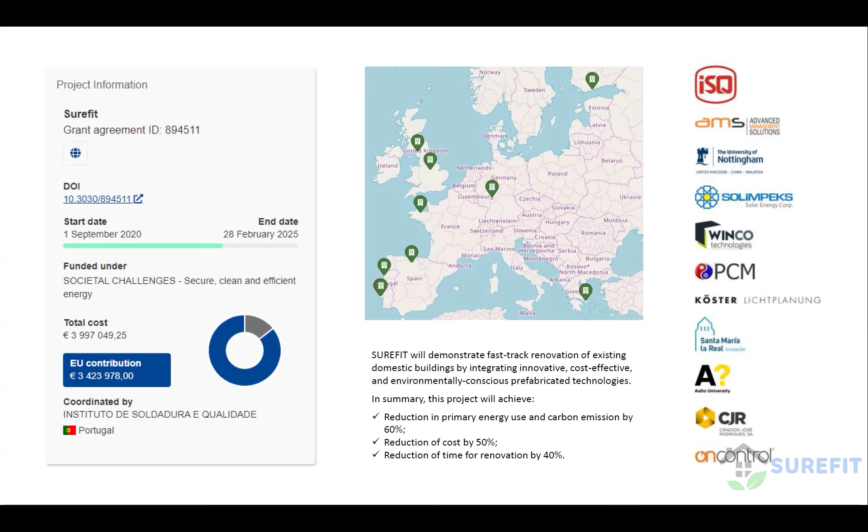We are going to develop solutions for the building envelope: bioaerogel, thermal insulation, breathable membrane, phase change materials, PV vacuum glazing, daylight louvers, and the use of renewable energy sources such as geothermal and solar assisted heat pumps, ventilation and heat recovery systems, and PVT solar collectors. And other technologies for heating, ventilation, air conditioning, and lighting, like evaporative cooling and smart controls.

We have tested the application of Surefit solutions in 5 countries with very different climate conditions, with heating degrees ranging from 840 to 4,000 degrees per year.

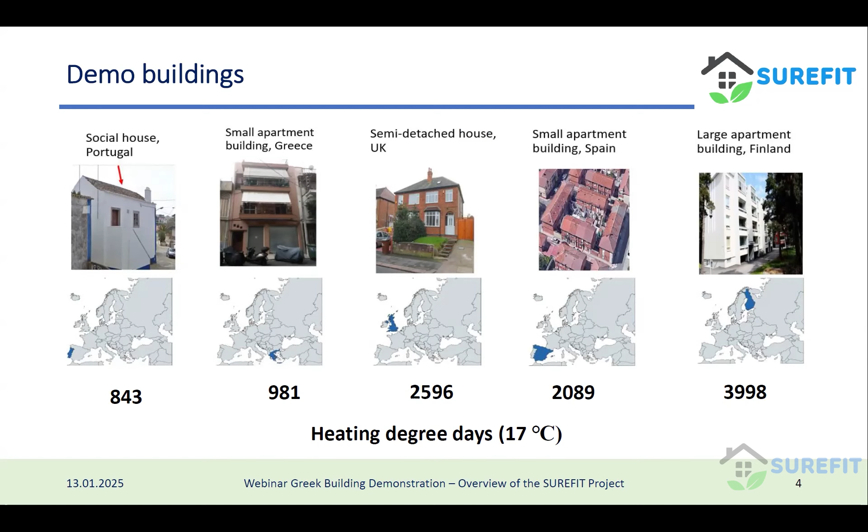Those who deal with energy conservation measures in buildings know that there are countless possibilities to make a home more efficient. Therefore, a tool was developed within the project to assist decision-making by balancing environmental, economic, and social criteria. This tool is perfectly aligned with the new EPBD review, and is now also available on our project webpage. I strongly suggest that you visit it.

That's it. Now let's see what was done in the Greek demo building. And now we can proceed with the next presentation. Thank you very much, Sergio, for this presentation. Let's proceed now with Maria Pappa, and we will see what has happened in this building in Peristeri.

Good morning, everyone. My name is Maria Pappa. I'm a chemical engineer, and I work in AMS as manager in EU projects. Today we will give a presentation about the Greek case study in the framework of the Surefit project. In this slide, you can see the main technical team that worked on the Surefit project for almost 4.5 years. Sofia Papadopoulou is a mechanical engineer, and also Konstantinos Tsoutis, construction manager, who is also the managing director of AMS.

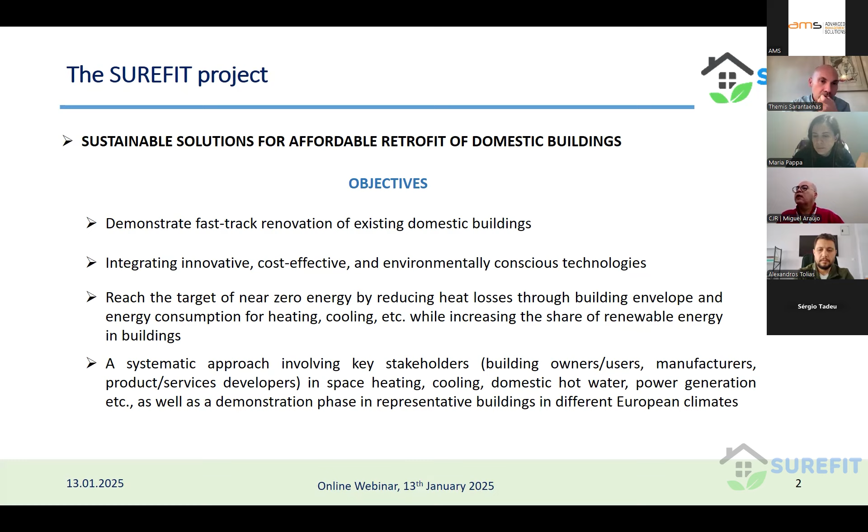As shown before, we had a number of available Surefit technologies: thermal insulation materials like bioaerogel, prefabricated panels, phase change materials, photovoltaic vacuum glazing windows, solar-assisted heat pumps and ground source heat pumps, integrated solar thermal and PV systems, and lighting devices, among other technologies. We had to decide...

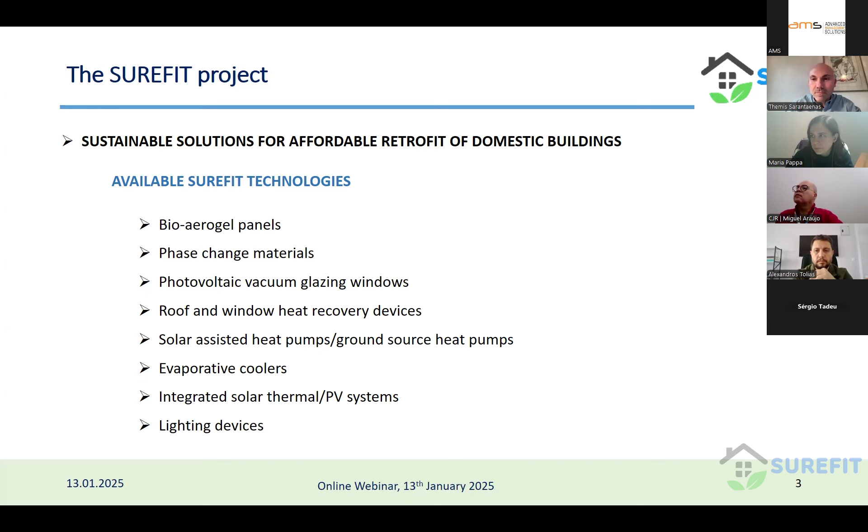...which of these technologies could be implemented in the Greek demo site in order to achieve the main goals of this project, which I will show you later. So these were the technologies we had to deal with, and now I will describe the building and the apartment in Greece. It is a first floor apartment in a 3-story building.

The apartment, shown in the yellow framework, was built in 1981 and is located in the city of Peristeri in Attica, Greece. So we are talking about South Europe, an Eastern Mediterranean country, with a hot summer Mediterranean climate type according to the Köppen climate classification. The orientation of the two main facades, as you can see in these schemes, is north and south.

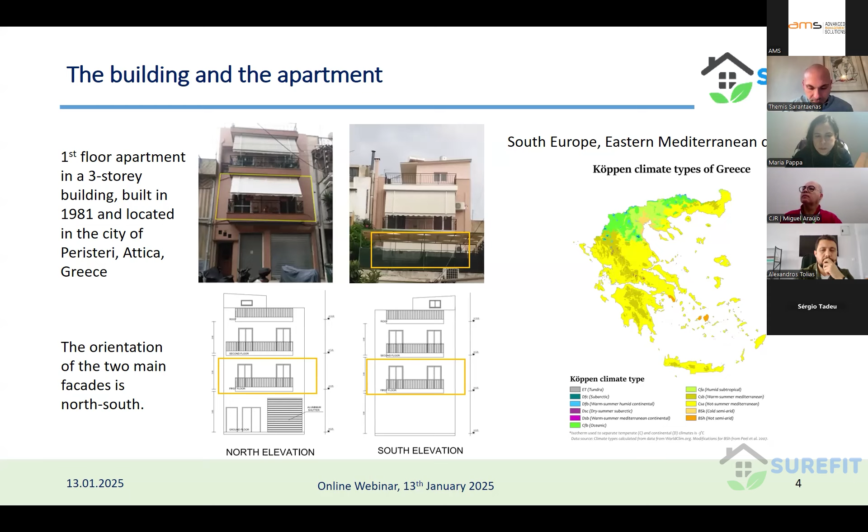Moreover, the building and the first floor apartment that we worked with is attached to two other buildings on the east and west sides, so we can assume it was kind of protected by the neighboring buildings, which were occupied, cooled and heated.

Below this first floor apartment, there is a ground floor that consists of two spaces that used to be shops but not anymore, so this area below the apartment is not regularly used, heated and cooled.

The first floor that interests us is a one-family apartment with 4 persons living there, approximately 90 square meters. The second floor, above the apartment we worked with, is also another family apartment of approximately 90 square meters.

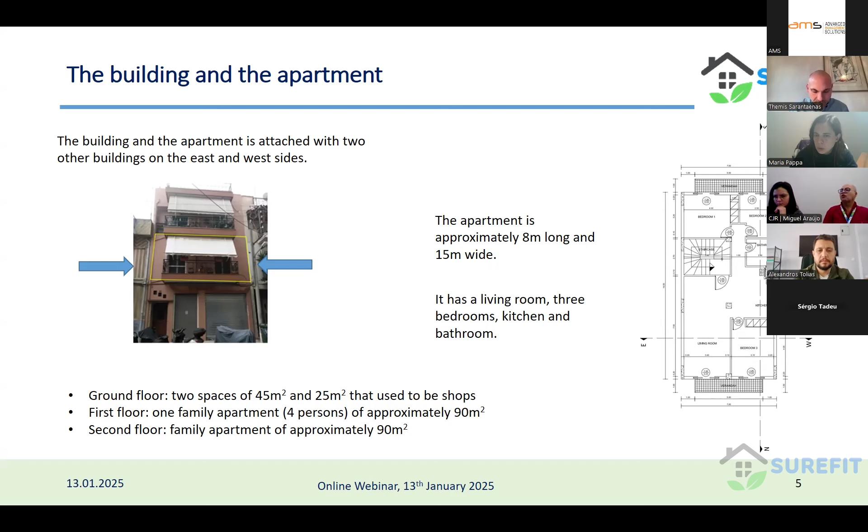In this scheme, you can have an idea of the dimensions of this building: approximately 8 meters long and 15 meters wide. As you can see in the scheme, it has a living room, 3 bedrooms, 1 kitchen and 1 bathroom.

The building is constructed with concrete pillars, and the walls, as you can see in the photo on the right, are made of bricks with 6 hollows, dimensions 19 by 9 by 6 centimeters, using an installation methodology of single brick, a gap, and another single brick. This gap was filled when constructed with a polystyrene layer.

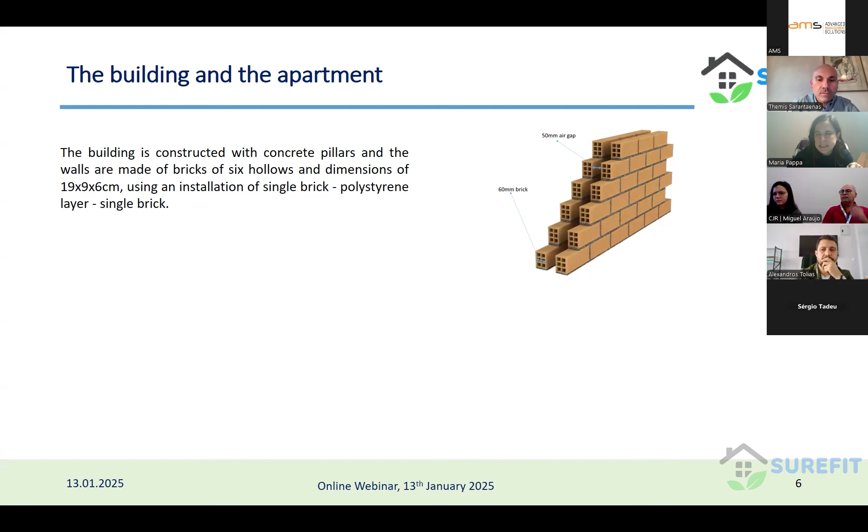But throughout all those years, more than 40 years, we assumed, and this was confirmed during the construction activities, that this layer was destroyed. Moreover, this building had sliding balcony doors with single glass 8 millimeters thick, aluminum frame, and awnings. Heating was applied through a diesel boiler, cooling was supplied through air conditioners, and hot water was supplied by a low pressure water system from a triple energy boiler.

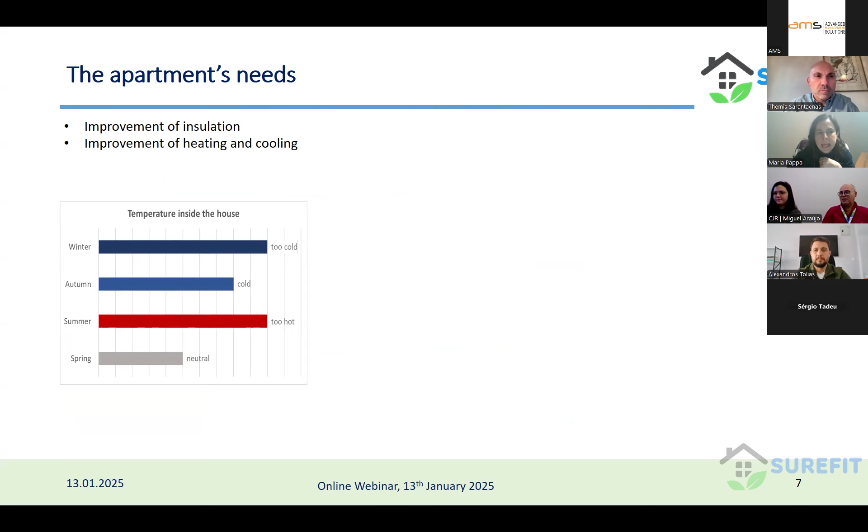Moreover, the occupants of this apartment said they had overheating issues through the windows because they had single glazed windows. And as you can see in the graphs below, they were very much annoyed by the noise coming from outdoor activities, outdoor leisure, neighbors, and road traffic.

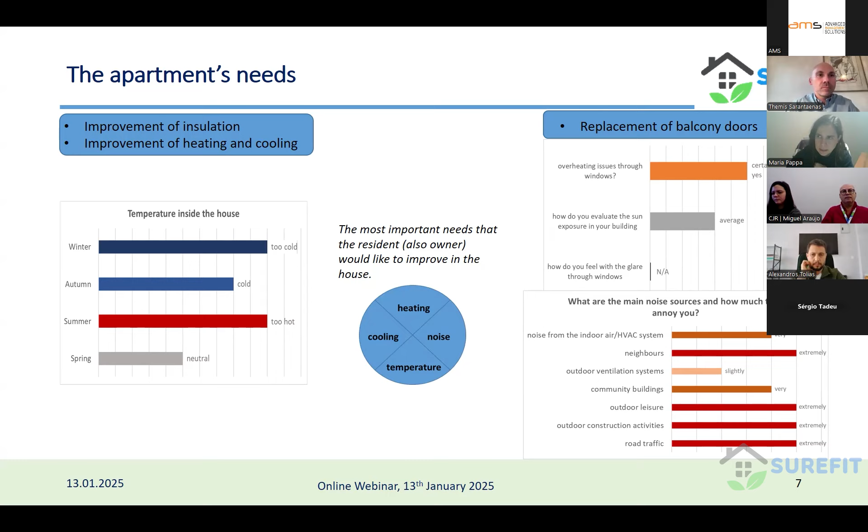In general, when they were asked about the most important needs of this apartment, they said that it had to do with the heating, the cooling, the noise, and the temperature.

We did a leakage testing in this apartment using the blower door methodology, and this showed that all frames had strong inflows on all sides, with a high index of 6.27 uncontrolled exchanges per hour at 50 Pascal pressure—a particularly high percentage of losses from the entire building shell. This results in the ineffectiveness of the heating and cooling system of the apartment before the renovations.

We also did thermal imaging, and as you can see from the shots from the interior of the house, there was poor thermal and air tightness properties of the existing frames and windows.

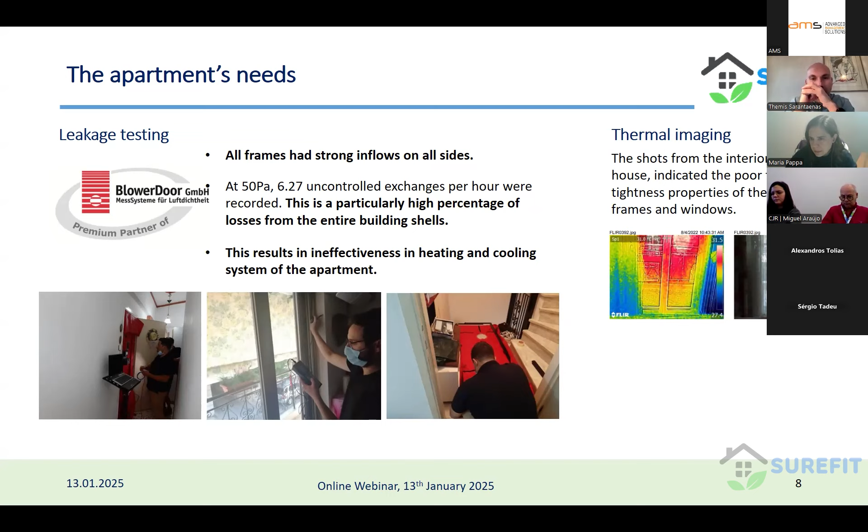Regarding the renovations that were decided, Aalto University, partner in the Surefit project, performed the energy simulations using the IDA software.

In this table, you can see the original purchased energy before the renovations, 120 kilowatt hours per square meter. The primary energy before the renovation was 143 kilowatt hours per square meter, and the CO2 emissions were estimated to be around 36 kilograms per square meter.

During this modeling, by applying a number of Surefit technologies and one commercial technology, and by taking into account the needs of the apartment and the owners, we reached a final case expecting 62% reduction in purchased energy, 61% in primary energy, and 61% in CO2 emissions.

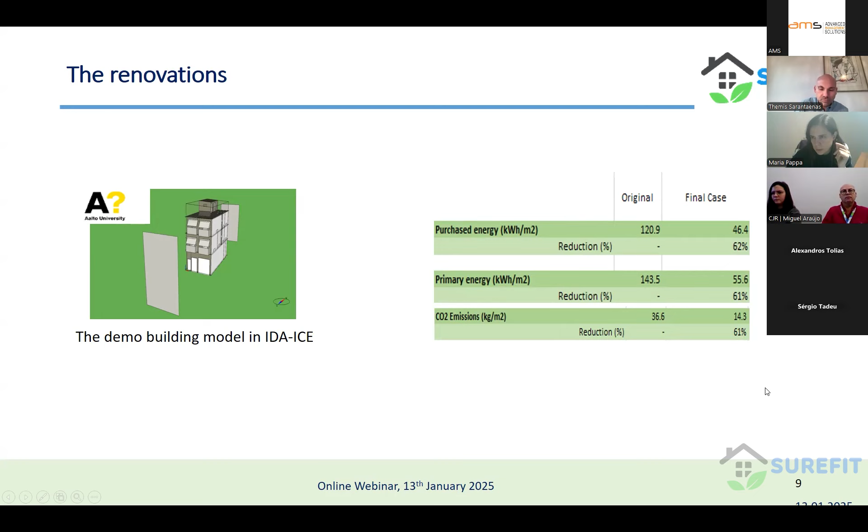So what were the renovations that have been decided? We decided to insulate, as you can see in red, the ceiling of the workshop located on the ground floor below the apartment, because this space is not properly cooled and heated.

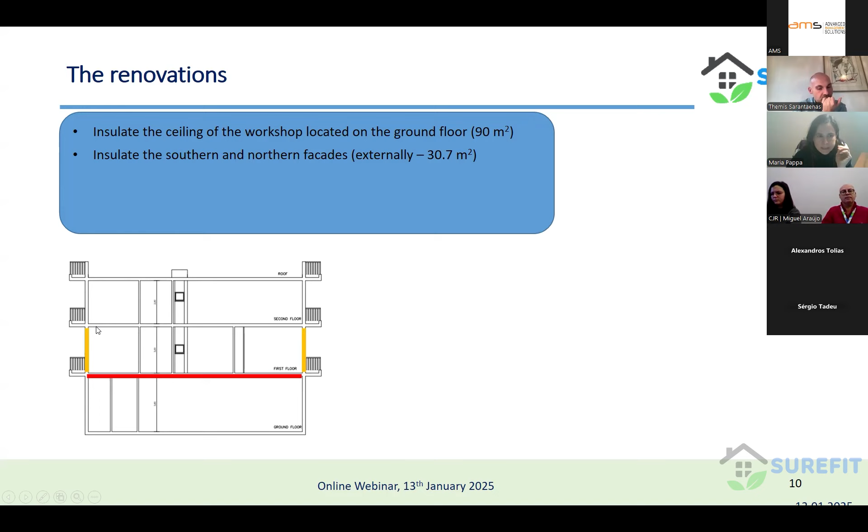We decided to insulate the southern and northern facades externally. We installed a PV vacuum window in one balcony door of this apartment, choosing only one because this technology comes from a university, so the resources and capacity to manufacture big units was not easy. The rest of the balcony doors were replaced with commercial double-glazed PVC balcony doors. Finally, we installed the PV thermal system for electricity production, domestic hot water, and space heating.

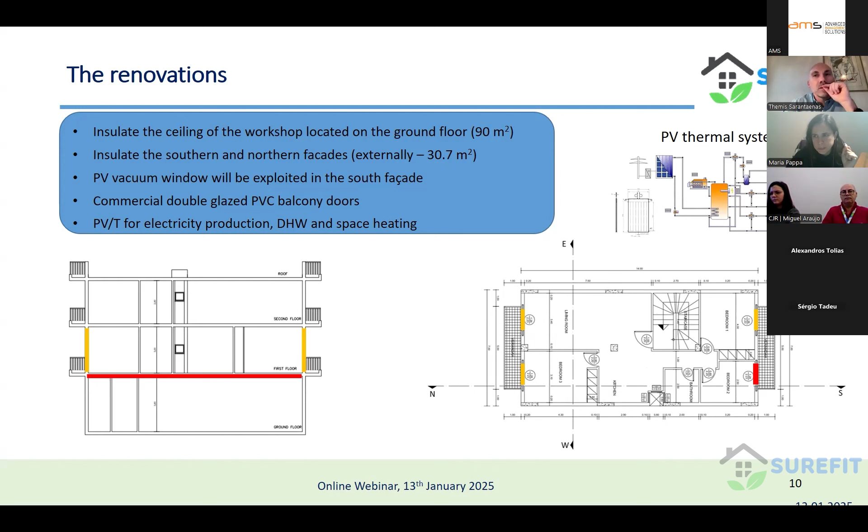I will start with the first installation, the PV thermal system. Mahmut from Solimpeks will give a short presentation after mine, where you will have the possibility to hear more details.

A PV thermal collector is a combined collector from a PV module for the generation of electrical energy with a highly efficient solar flat collector for the production of heat energy. The solar to electricity conversion efficiency is around 20%, the solar to thermal conversion efficiency around 47%, and the lifespan of this technology is more than 20 years.

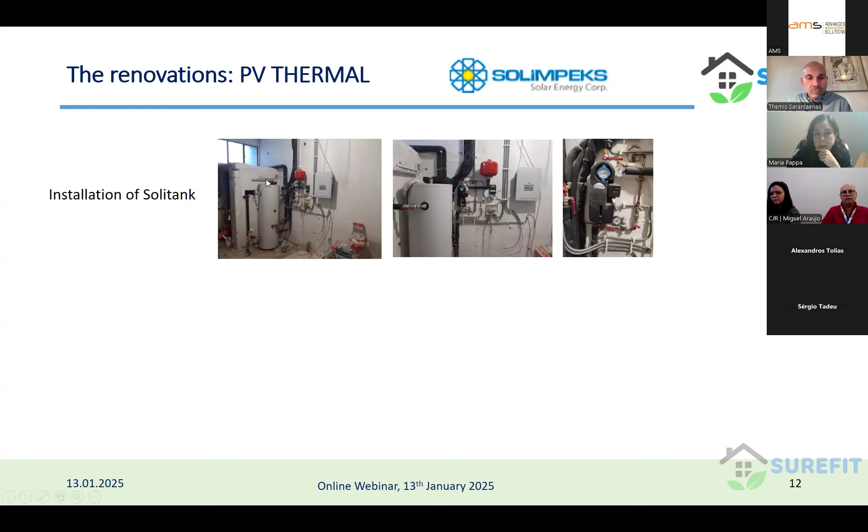We had to install the tank of this system, and the only space available in this building was the ground floor. We had to demolish an existing water closet in order to fit all this equipment, and we had to do the piping and wiring connections, passing them through the first and second floor in order to reach the terrace where we installed the PV panels.

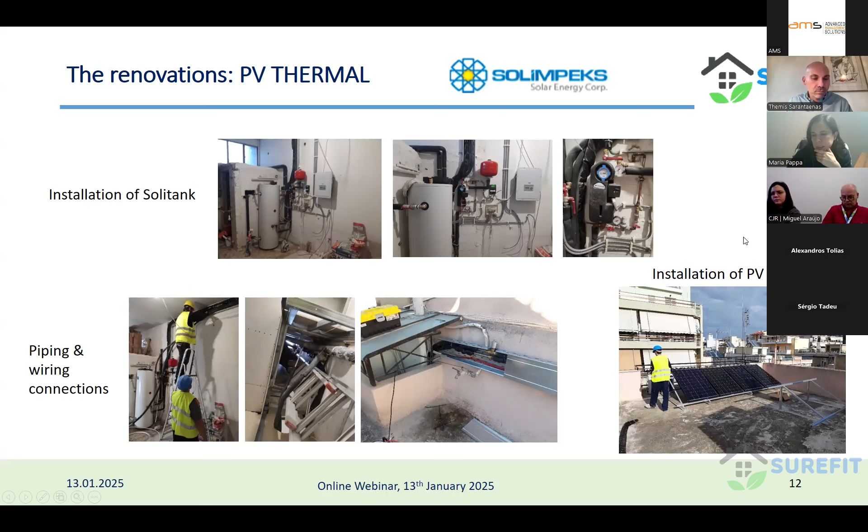This was the first technology. The second one was a commercial technology. As I mentioned before, 3 balcony doors were replaced with commercial systems, PVC double-glazed windows, PVC frame. You can see the U value of the system, and of course external aluminum rolls.

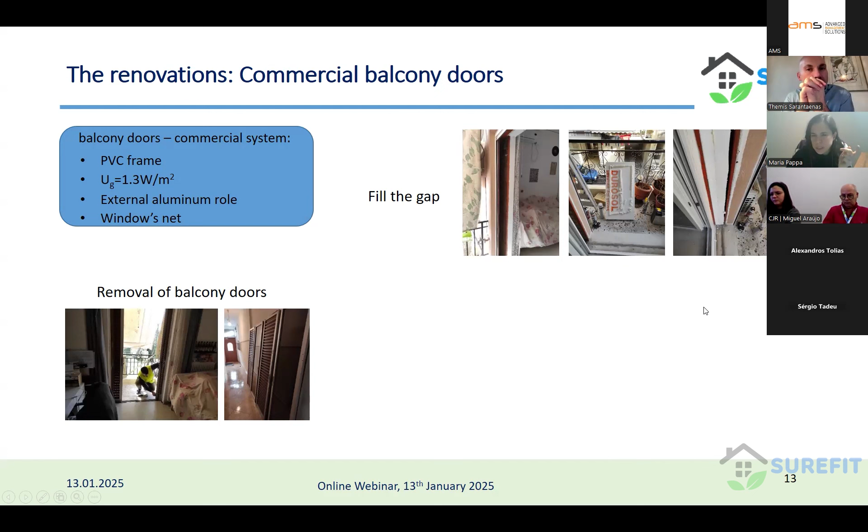So we had to remove the balcony doors. The existing balcony doors were sliding doors. After the removal, we had to cover the gap that was created, and for this we used a commercial thermal insulation panel and installed the new balcony doors.

The third technology is from Winco, the Skytech Pro XL membrane. This is the membrane that we used to insulate the ceiling of the ground floor, a 26 millimeter Skytech membrane. You can see the thermal conductivity, 0.029. It also offers sound reduction, and is available in 3 thicknesses.

This product is mainly installed to act as a rain screen in an existing facade, and to operate efficiently a ventilated air gap is needed on the external side of the membrane. In the Greek demo case, this was not possible due to the restricted height of the facade and the balconies. So we decided to use this product only as a thermal and sound insulator for the ceiling of the ground floor.

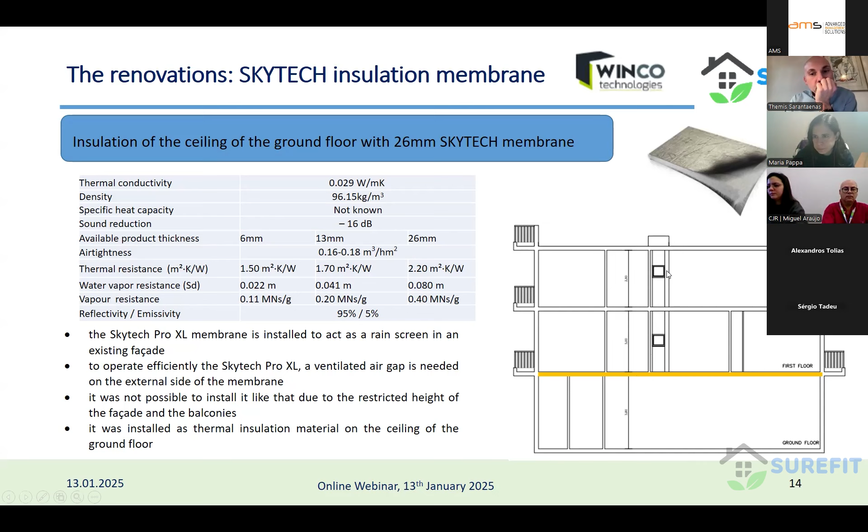So we had to remove the false ceiling of the ground floor that existed. We had to place a frame, and on top of this frame, we put the membrane. Then reinstallation of the false ceiling, and do the final painting.

The fourth technology is coming from CJR, partner in the Surefit project, and is the prefabricated insulation panel. The idea was to put thermal insulation on the north and south facade of this apartment. We chose a sandwich-like panel of 30 millimeters commercial polyurethane panel plus 20 millimeters aerogel blanket commercial plus 20 millimeters XPS panel. The thickness is 7 centimeters because we had this restriction for the building. You can see the U value of the system, existing wall plus the panel, is 0.22.

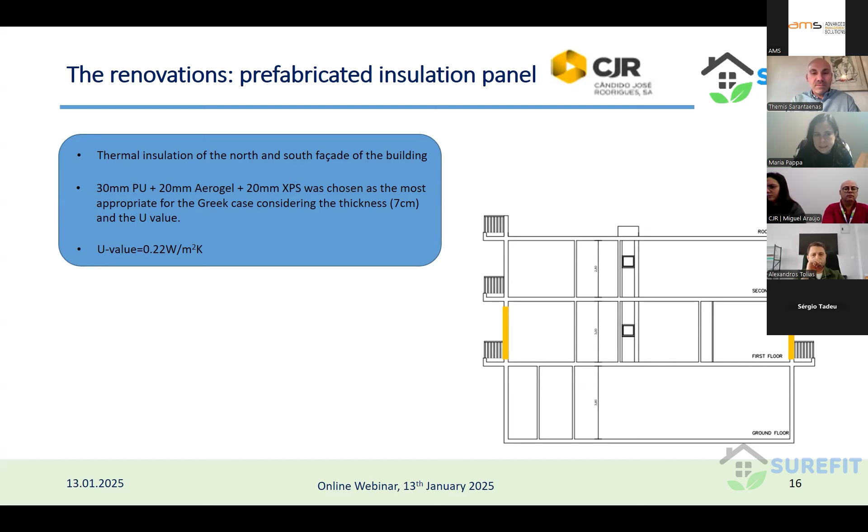So we did the installation as we do for commercial thermal insulation panels, ETICS. We put an adhesive at the beginning, we placed the panels. Of course, we had to cut them in the appropriate dimensions and also drill holes for the piping from the air conditioning that was existing. We put sealant between the panels to seal the gaps. We did the fixings, placed the reinforcing mesh, the mortar coat after that, and the decorative finishing.

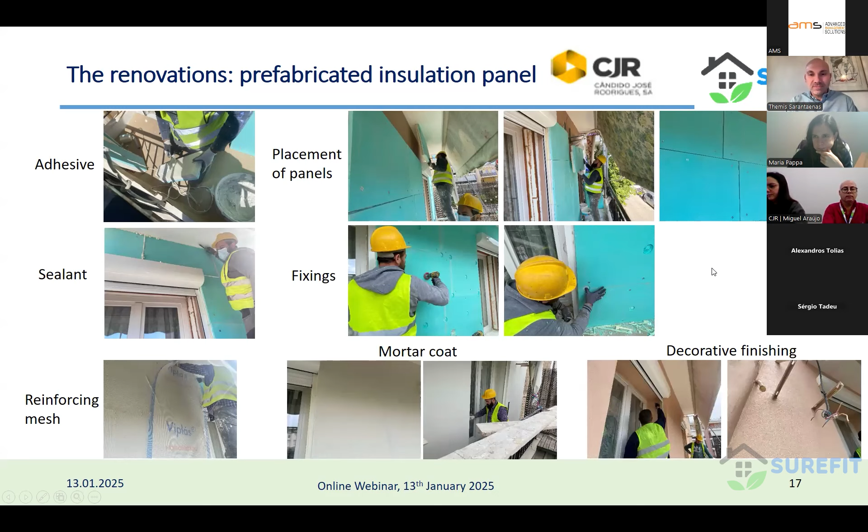And the last technology in this building was the PV vacuum glazing from the University of Nottingham. You will see more details about all these technologies after my presentation, but to have an idea, this is the system you can see in this scheme. It consists of 2 glasses, and in between them there is a thin film of a PV layer. Then we have an air gap, and a vacuum layer, and then we have the low emissivity coated glass.

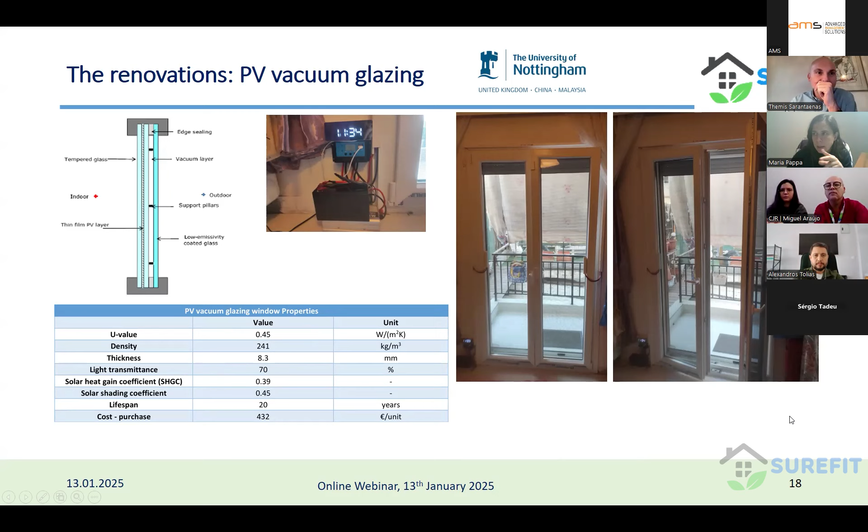And you can see the U value of this system, 0.45. The thickness, 8.3 millimeters, and the light transmittance is 70%. So we installed this system in a double balcony door in the south facade of the building.

Now, regarding the evaluation of all these renovations, based on the data we have from the energy monitoring, we put energy meters, so these are real data. You can see the total electricity consumption for this apartment from the grid before the renovation was 5,600 kilowatt hours per year. In the post-renovation phase, we have 2,400 kilowatt hours per year, plus 1,800 coming from the PV panels we installed. Transforming them into primary energy, we have a reduction of 56% between the pre and post-renovation phase.

Regarding the oil energy consumption, before the renovation it was something like 5,000. After the renovation it is 2,300. So the corresponding primary energy consumption reduction is 52%. And regarding the total primary energy, the reduction achieved due to the Surefit technologies is around 55%, which is very close to our target that was 60%. Regarding CO2, the total CO2 emissions reduction is again 55%. The target was 60%.

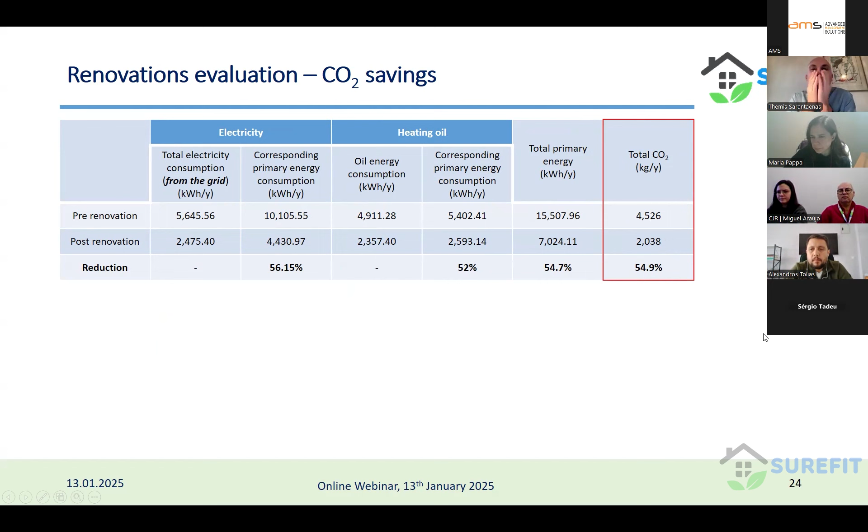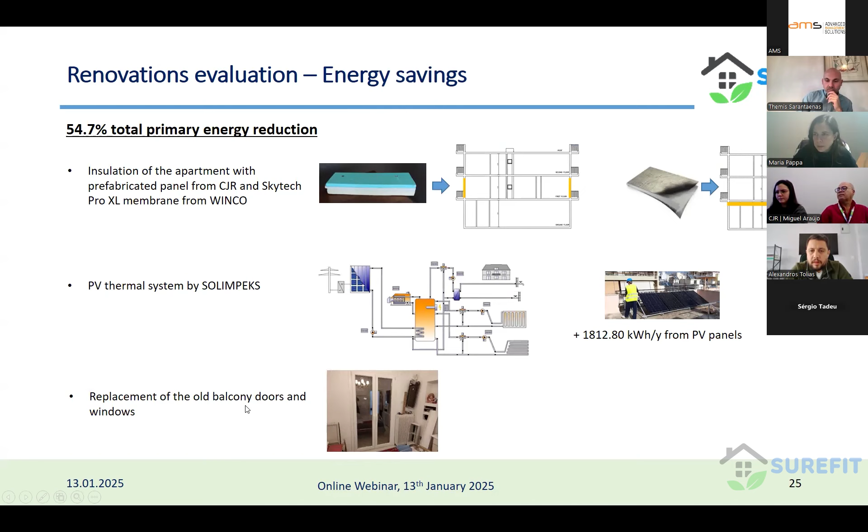Now, this 55% total primary energy reduction can be attributed to the insulation of the apartment with a prefabricated panel from CJR and the Skytech Pro XL membrane from Winco. It is also attributed to the PV thermal system by SOLIMPEKS and also to the replacement of the old balcony doors and windows. For this, we did another air tightness test after the renovations.

You can see that before we had 6.2 air changes per hour. When we replaced the balcony doors, we have 2.2. So we achieved a 65% improvement of the air tightness. Now we have this satisfactory index of losses from the entire building shell. This increases the efficiency of the heating and cooling system of the apartment and confirms the quality of construction interventions regarding air tightness.

Also, during winter the building was slow to heat up, now it is quick. During summer, it was slow to cool this apartment down, now it is quick. Also regarding noises coming from outside, before they were extremely annoying or very much annoyed by the outdoor noise. Now this has very much improved. They are slightly annoyed, and this is not only because we changed the balcony doors.

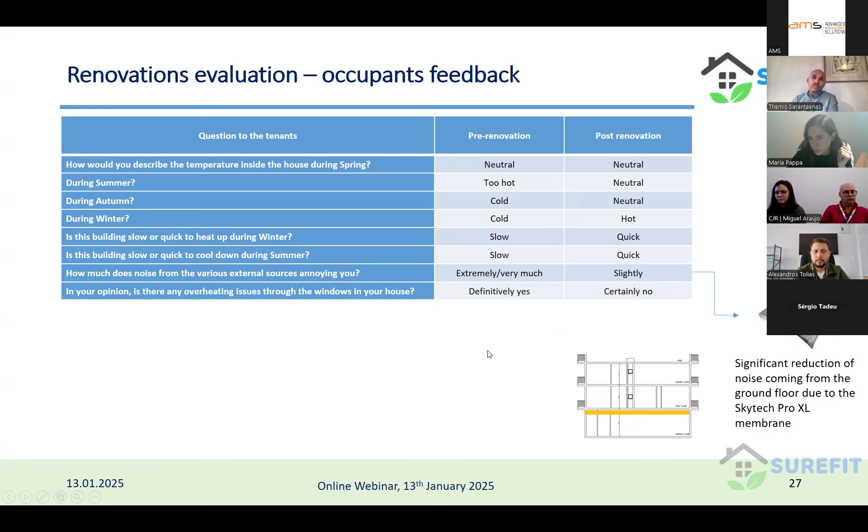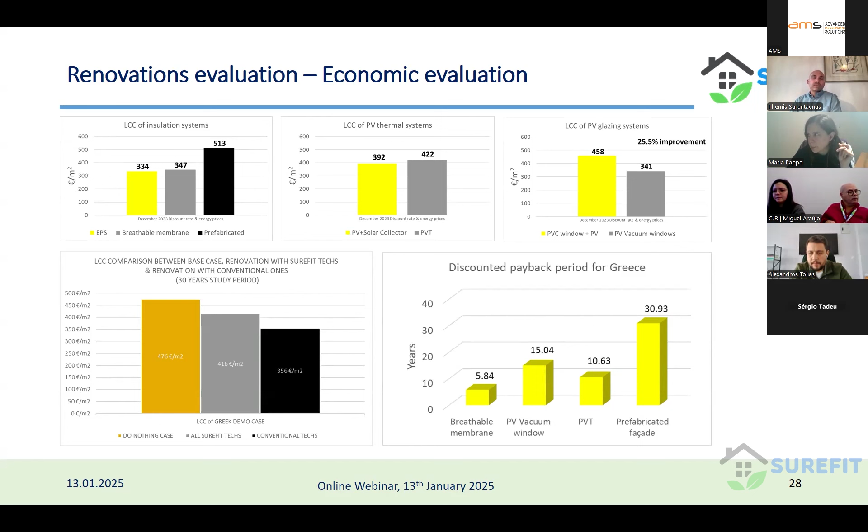By applying Surefit technologies in this apartment, we have a 55% reduction of the total primary energy and the CO2 emissions. We have 42% of the electricity needs coming from the photovoltaics that were installed, and 65% improvement of the apartment's air tightness.

We have a 25.5% improvement in the life cycle cost analysis for the PV vacuum glazing compared to conventional technologies, and comparable life cycle cost assessment for the breathable membrane and the PV thermal system compared to conventional technologies.

We achieved a payback period of almost 6 years for the breathable membrane and almost 10 years for the PV thermal system. The payback period for the prefabricated panels and the PV vacuum glazing system is more than 10 years, which is out of the scope.

Unfortunately, we did not achieve any installation time reduction compared to conventional systems; the installation time is almost the same. The last point is that we received very positive feedback from the occupants related to the building performance.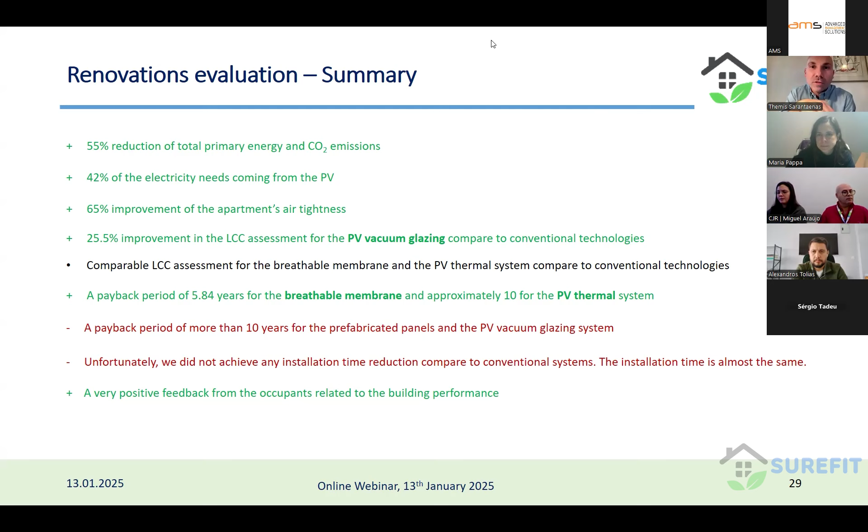Are we going to watch the video now or at the end of all presentations? It is up to you. Okay, let's see it at the end of all presentations, so it will work as a summary.

So we just saw all these impressive results from the Greek demo in Peristeri.

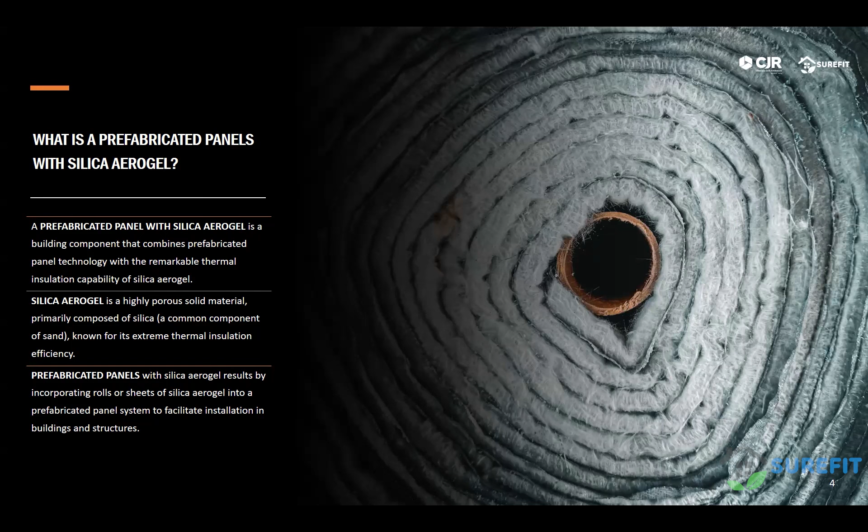The silica aerogel blanket is an excellent insulation, which allows with little thickness to obtain results like other materials on the market. However, to make its application faster and more efficient, it was decided to prefabricate the technology and convert the already known external thermal insulation composite system, the ETICS, into the one we present today. Our insulation panel, SAPPETI, combines silica aerogel in a blanket with a more rigid insulation material to provide more resistance, better handling, and fixing, making it prefabricated.

We developed two different solutions: one for Spain with 20 millimeters of XPS plus 20 millimeters of silica aerogel and 20 millimeters of XPS, and another for Greece with 30 millimeters of polyurethane attached to the building, plus 20 millimeters of silica aerogel and 20 millimeters of XPS. We already made some tests to determine the thermal resistance of this building component, the prefabricated panel, and also to get the U value.

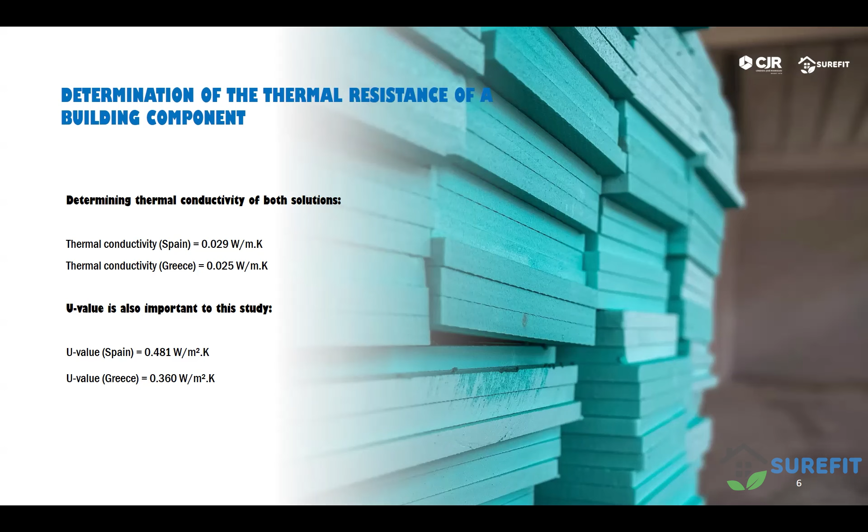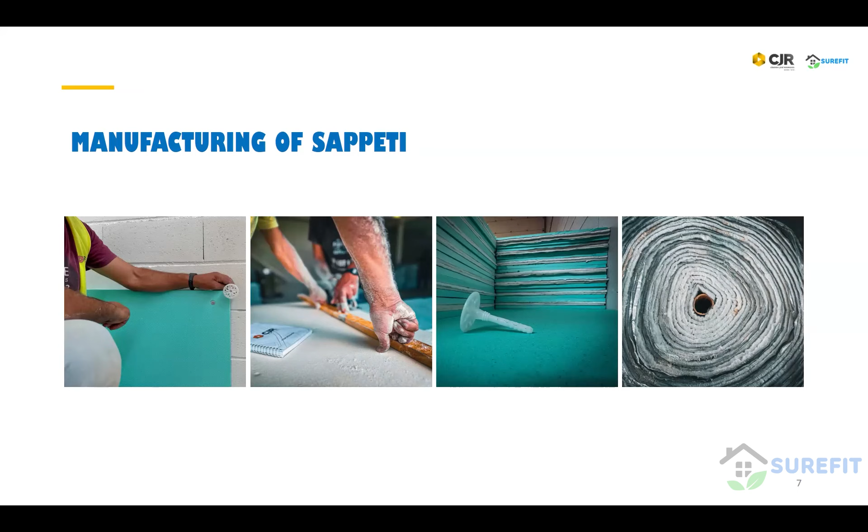Currently, the panel is produced manually, a process that ensures attention to detail and the quality of the final product. However, this method requires more time and entails higher production costs. If this solution is implemented on a large scale, the production process is expected to become automated, significantly reducing costs while maintaining high quality standards.

Next, we'll see a video of that production. As it was not possible to obtain a 20... no, you can't hear me.

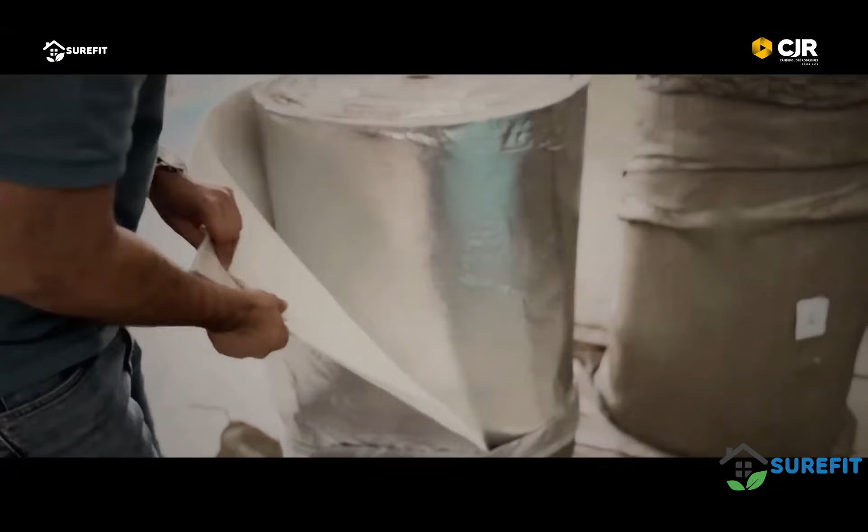As it was not possible to obtain a 20 millimeters silica aerogel blanket, we requested a 10 millimeters blanket, but with one side covered with aluminum foil, which allowed it to be glued to the more rigid panel, XPS and polyurethane, as we have seen on the video. After that, we joined the two parts with the help of screws, which allowed better handling and possible cutting when placed in the building, making this technology extremely flexible for any building and facade.

By associating silica aerogel with an insulation panel, it is possible to obtain excellent thermal insulation - silica is very good for thermal insulation. This prefabricated panel is lightweight, with reduced thickness - for example, in the case of the Greek pilot, we only need 7 centimeters. We can get strength and durability; the panels are robust and resistant to various weather conditions. We also can reduce energy consumption - when we talk about prefabricated panels and standard measurements, we can reduce energy consumption, especially on transportation, and we can get indoor comfort, of course.

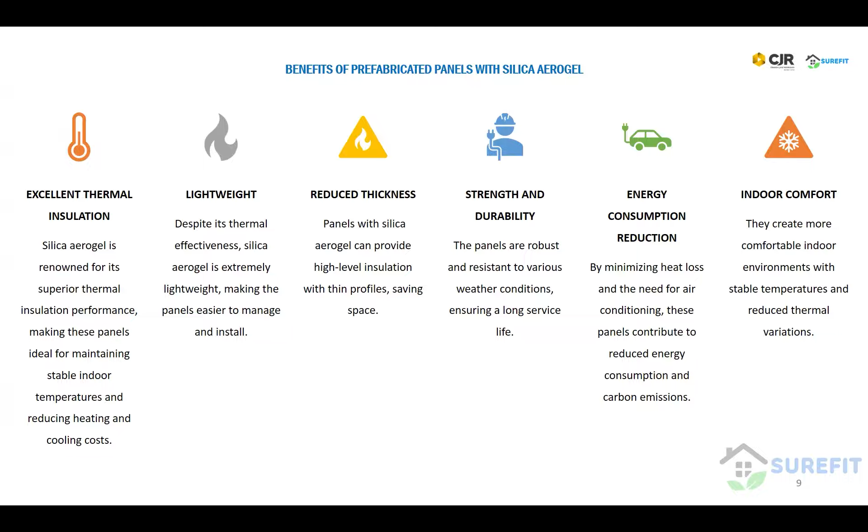I would like to draw your attention to the introduction of prefabricated panels in Spain. This application is tailored to meet Spain's specific climate and regulatory requirements, ensuring effective thermal insulation.

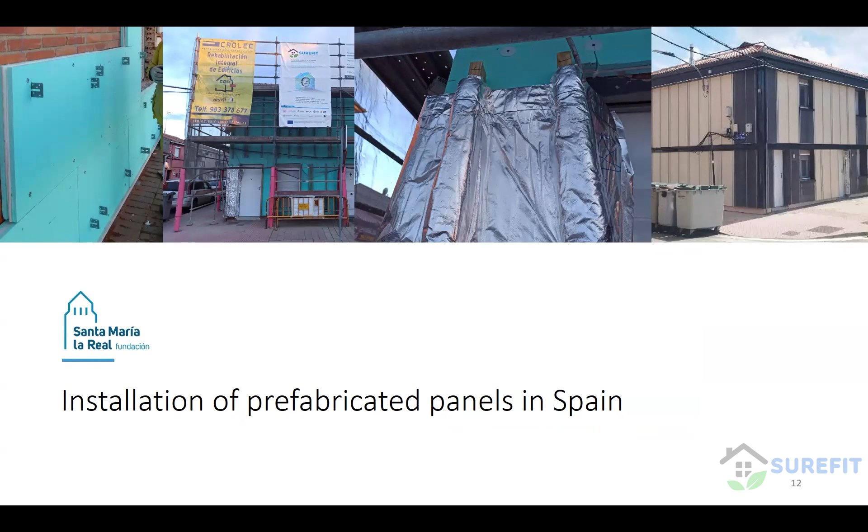So the mess is real here. We can see a lot of cables, holes for the windows, corners, and even so, our prefabricated panel was installed successfully. So it can be adapted to the structures.

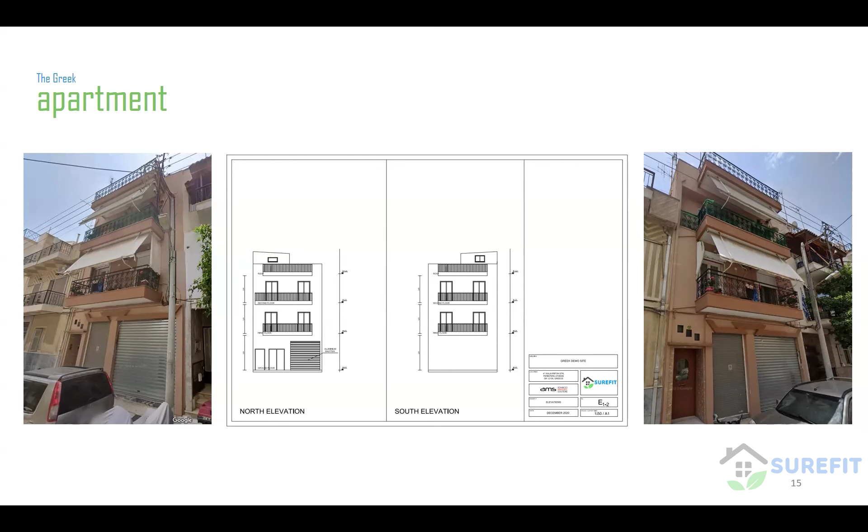Here we can see the facade where our prefabricated panel was installed. This one and at the north and the south - two facades, I'm sorry.

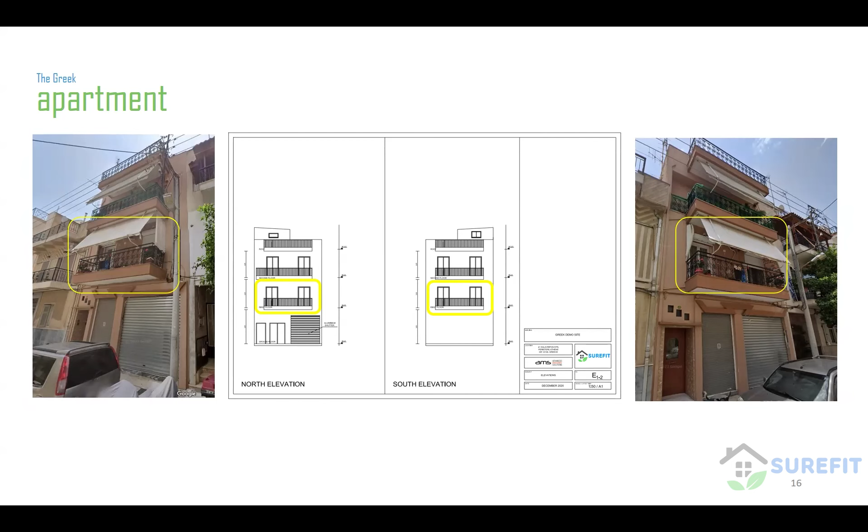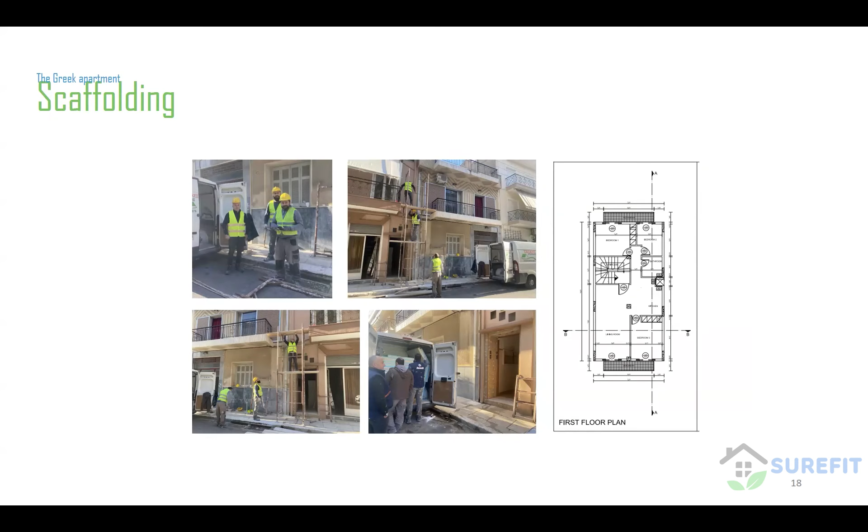This slide shows the use of scaffolding during installation, ensuring safety and efficiency in applying the prefabricated panels.

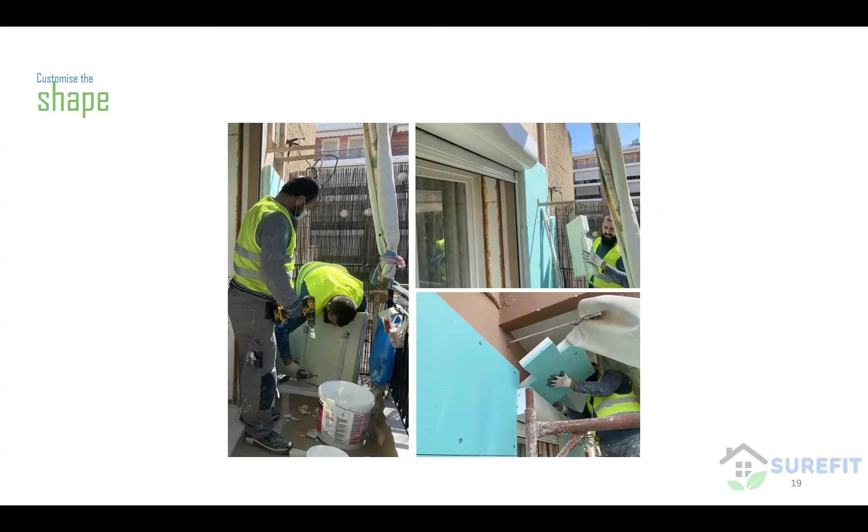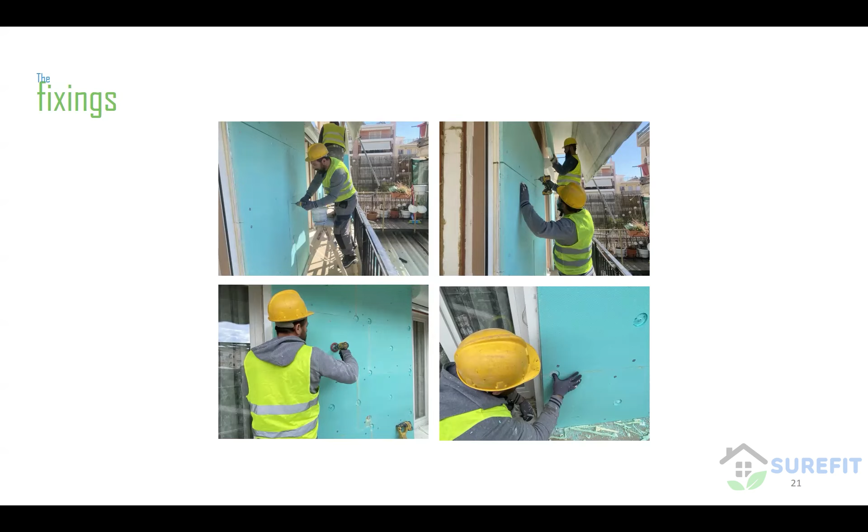So we used adhesive, but we also need fixings. This one focuses on the fixings used in the installation process, which guarantee stability and long-term performance of the panels.

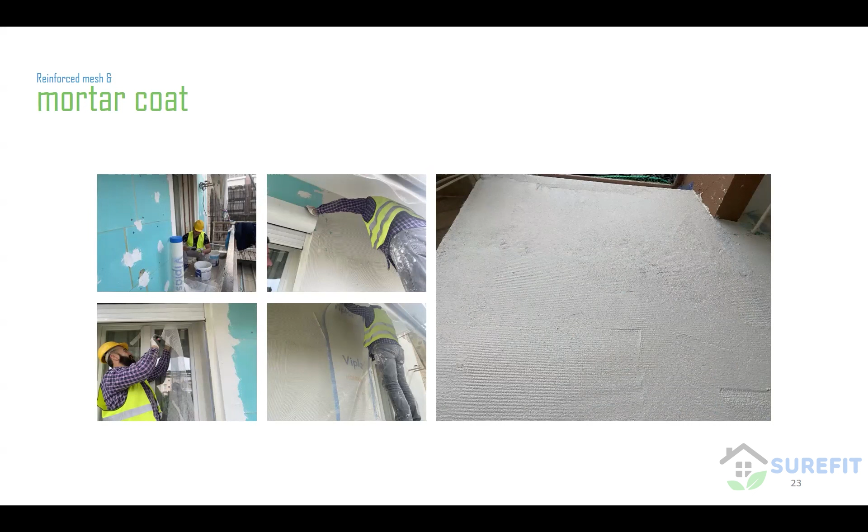I want to refer that all installation was conducted by AMS. We only supplied the prefabricated panel.

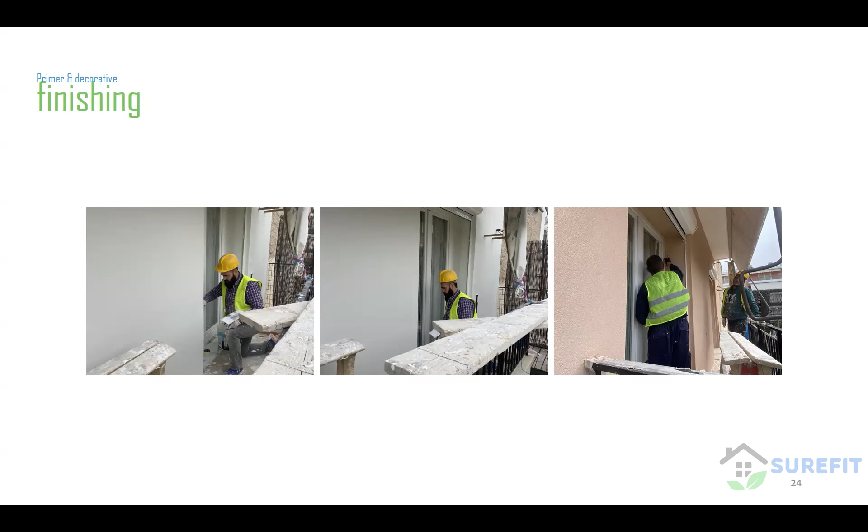We would like to summarize the technological advancements of the SUREFIT panels. Their energy efficiency, ease of installation, and comfort are the most important advantages, along with their role in promoting sustainability.

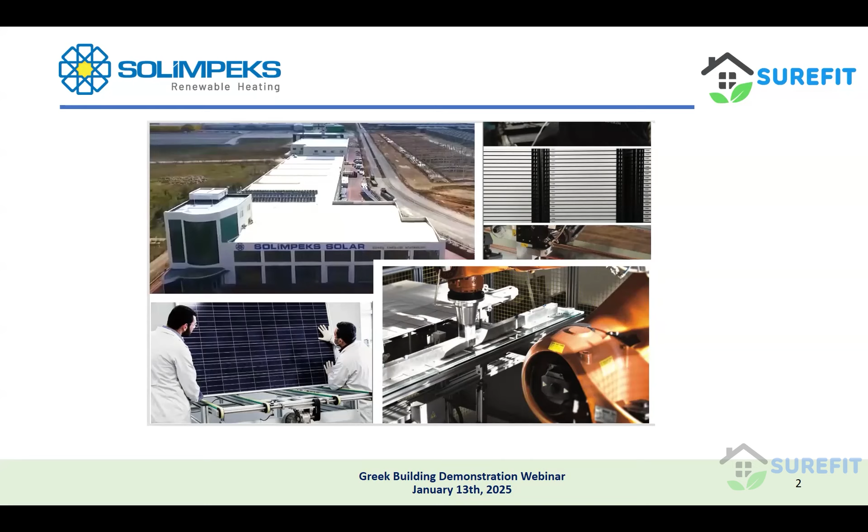So SOLIMPEKS is a renewable heating company located in Konya, Turkey, producing solar thermal collectors, hybrid PVT collectors, heat pumps, and boilers in a 30,000 square meter production area. Apart from that, we have SOLIMPEKS GmbH in Germany, in Hanover, mainly for the European market. And we are commissioning a second factory, which will be functional in the first half of this year, for integrated boiler and heat pump systems.

So we are also producers of heat pumps, and our heat pump series range from domestic use to swimming pool applications. The first one on the left-hand side is the hot water heat pump. It's an integrated unit for domestic use, as the bottom is the hot water storage boiler, and the top is the heat pump, the head.

Our heat pumps are now in the list of the heat pump subsidy policy of Netherlands and the BAFA list of Germany, so users in Netherlands and Germany can use government incentives by installing our heat pumps.

So we also have high capacity heat pumps, which range from 100 kilowatts to 200 kilowatts, and they are appropriate for commercial applications and as a substation for district heating applications.

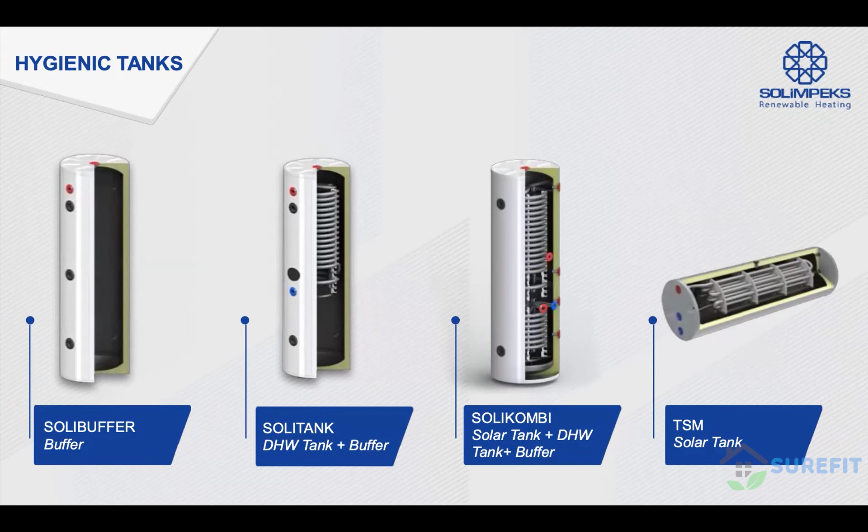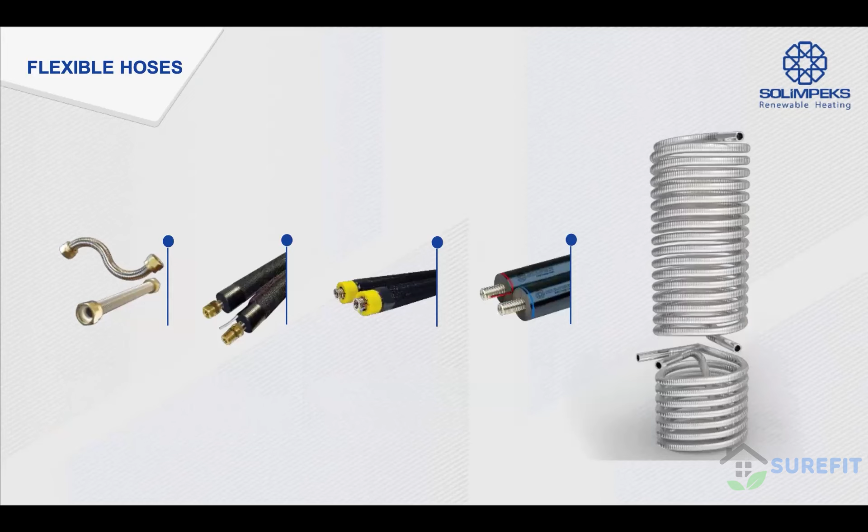We also have enamel coated tanks, which will be produced in the second factory, with a capacity of 100,000 units per year. We also produce flexible hoses for mainly hot water applications, from boilers to solar thermal applications.

We also have a new product that allows you to obtain direct heating from the PV panels. This is actually a control box which controls the electrical resistance heater inside the boiler, and which has 99% efficiency, allowing direct heating from the PV panels.

We have more than 20 certificates, and the PVT collectors that we installed as part of the Surefit project have the Solar Keymark certificate, so we can export these units all over the world.

We also have SOLIMPEKS Academy, which I think is worth mentioning, where we train engineers, contractors, installers, and students about solar collectors, heat pumps, boilers, and solar carports. We also provide training about the nearly zero energy building concept, which aligns with Surefit's goals. So in addition to our technical capabilities, we can also take part in dissemination activities.

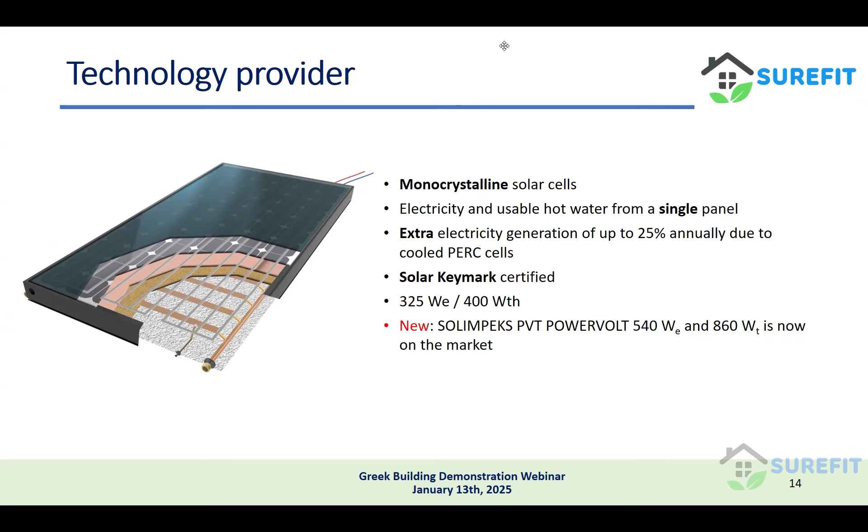Sorry Themis, okay so it's not correct. I have additional pages. Would you like to share from your computer now? We can stop sharing, and Mahmut will share from his computer. Let me just... but if you could improve the mic a bit, because you sound a bit off. You did something before, is it okay now? Now it's perfect. Okay, can you share now? Let me just hold on, please. Just a second. Please, if you have any questions, just interrupt me, and we're waiting for the new presentation to be shared. It's the one you sent us, Mahmut, a while ago. Okay, can you see it now? We can see it, just a second, and we can see the Greek case now.

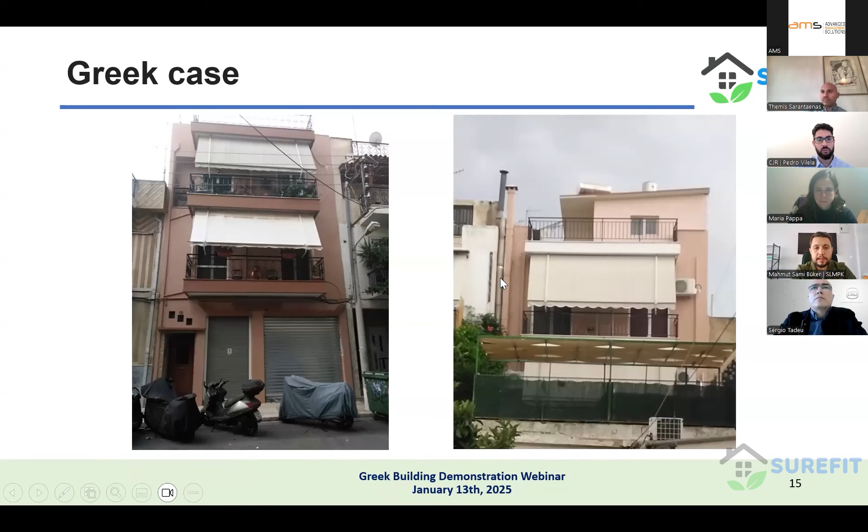12 PVT panels have been installed, along with a 3 kilowatt capacity Huawei inverter, 2 units, and 2 units of solar tank at 300 liters, plus around 100 meters of DC cabling, control units, mounting sets, and fitting material. On the right-hand side you can see the technical schematic diagram of the installed system, and the solar panel is facing the sun.

The pipes under the photovoltaic layer capture the heat accumulated inside the panel. The mixture of water and solar liquid carries this heat to the boiler system, which you can see in the front, through the serpentine.

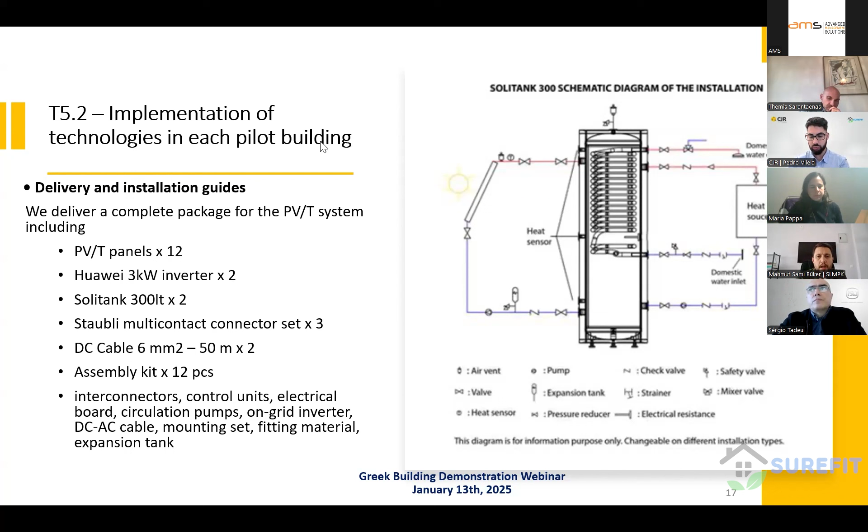The same is true for the Spanish case. We can discuss it later, but there are 3 dwellings with almost identical 12 panels, though with slight changes. This is actually a very important page.

For energy efficiency, if you just install PV solutions, you may get around 20%, because commercially available PV solutions have 20% electrical efficiency. But if you use only solar thermal collectors, it's around 40 to 45%. In this case, for the PVT panel, it's 47%.

But if you combine photovoltaic with thermal solutions, you may get more than 60%, because around 45-50% thermal efficiency you get from the thermal side, combined with around 20% electrical efficiency from the photovoltaic side, counts like 60%.

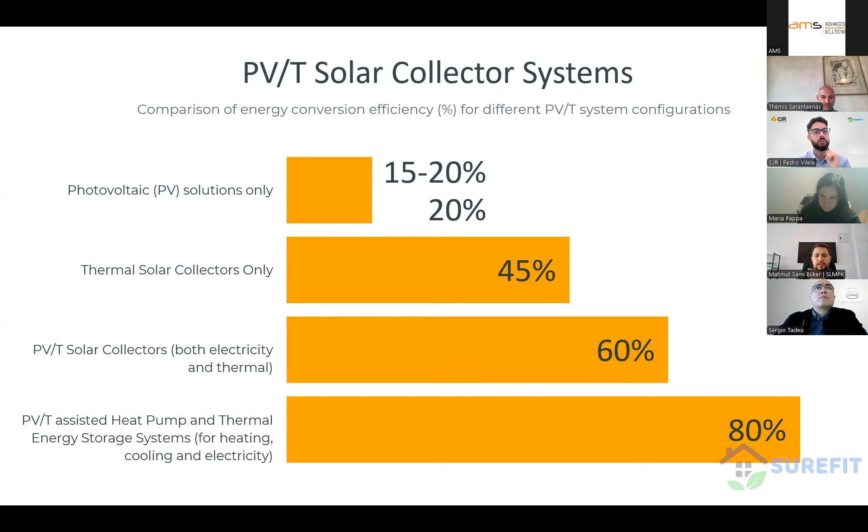But even more, if you can assist this PVT system by coupling it with a heat pump system and thermal energy storage system, you may end up getting more than plus 80%. This is where the real value occurs, because the real energy conversion efficiency marks the highest here.

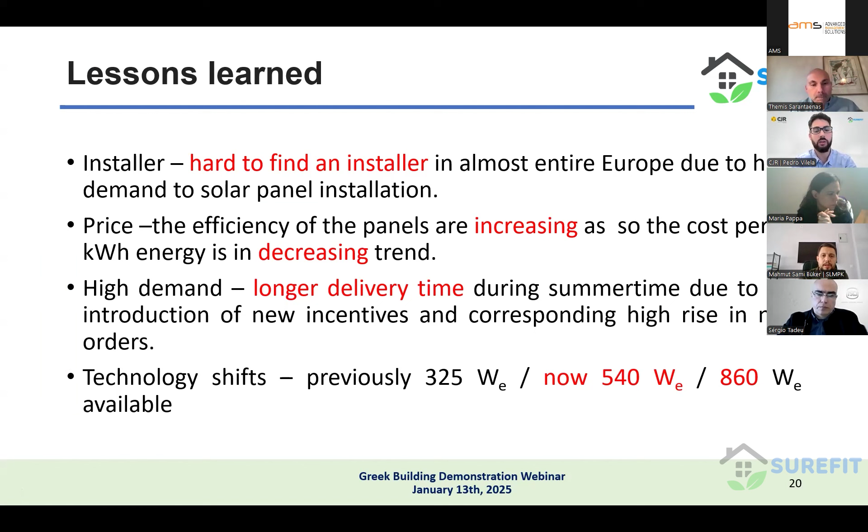So this is about the project, but let me share some small remarks. Technology shifts, and now we produce 540 watts of electricity from a PVT panel, even 860 watt electric thermal PV panels are on the market now. Prices are decreasing because panel efficiency is increasing, but around Europe installation is still a real hard case due to the lack of installers.

We are also involved in another project, the Greek-Turkey Solar Energy Excellence Hub project, and we are planning to start a new project installing heat pumps in Athens in the new year, hopefully. So we will be visiting Athens even more.

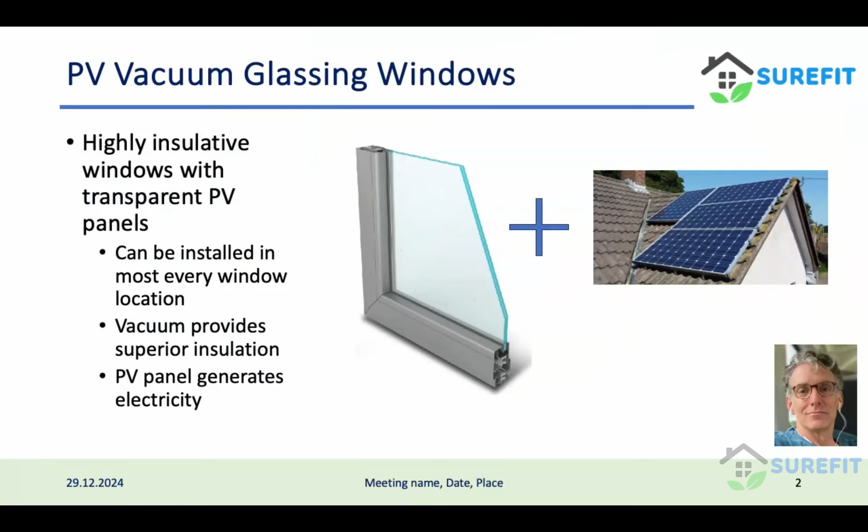PV vacuum glazing windows combine two things: one is the vacuum insulated window, which is two pieces of glass with a vacuum in between, and the other is a transparent PV panel laminated to the window. It can be installed in most every place a normal window could be. The vacuum insulation provides superior insulation, and the PV panel generates electricity at the same time.

Windows started as single panels, then moved to double panels for more insulation, then double panels with a larger gap insulated with gases like argon. To get really effective insulation, they started going to triple pane windows, but they became thicker and thicker.

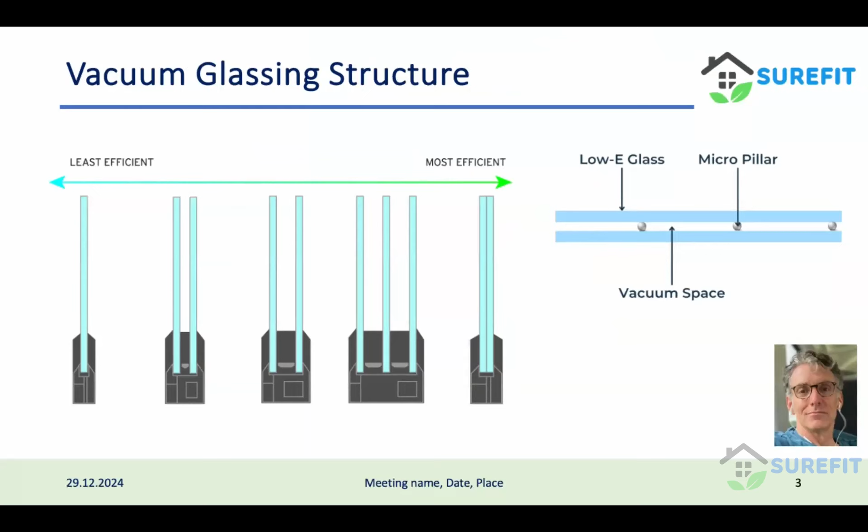But what we offer here is two pieces of glass very close together with a vacuum in between. They're so close together they look like a single piece. Because of the vacuum, they would collapse if they didn't have supports, so there are little stainless steel balls or pillars in between to keep the glass from collapsing on each other.

Looking at how they compare: single glazing is about 4 millimeters thick with a U value of 5.8. Double glazing is 28 millimeters thick with a U value of about 1.2. Triple glazing is 36 millimeters thick with a U value of 0.8. This 36 millimeters gets to the point where it's so thick it can't be installed in normal window installation locations; special framing and structure has to be applied. But the vacuum glazing is only 6.7 millimeters wide and offers even better insulation with a 0.7 U value. So it allows all the advantages of triple glazing plus some, while being installed in all the places you can install single glazing.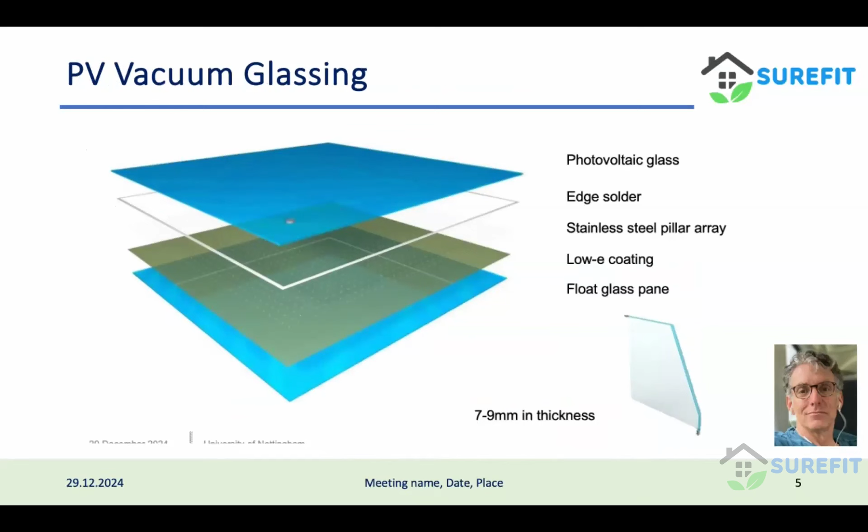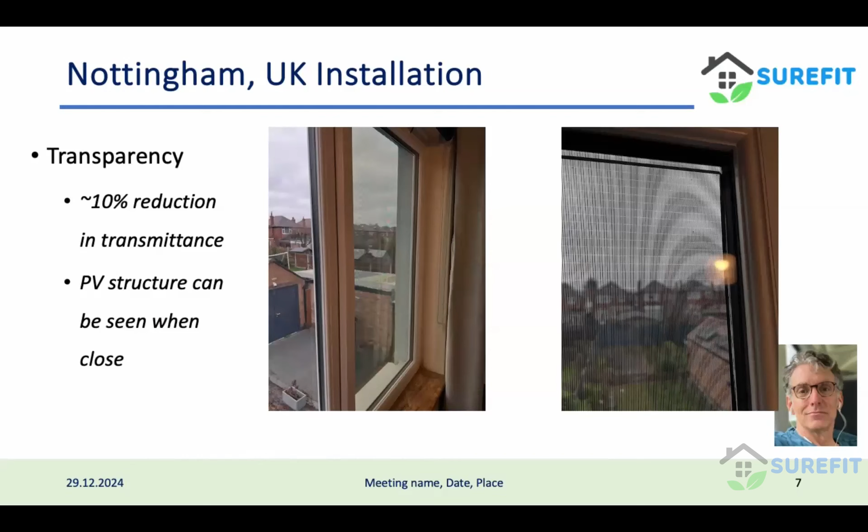Hopefully we can start installing these on new houses, and there's a couple startup companies in the UK doing that right now. Future uses include new builds, retrofit homes, and businesses large and small, from older homes to new builds. We've even done some modeling on future PV glazing greenhouses, where the greenhouse generates its own electricity. The vacuum glazing is so insulative that it can be heated with just the LEDs in many cases. But that's PV vacuum glazing, how it's used, and the advantages of it.

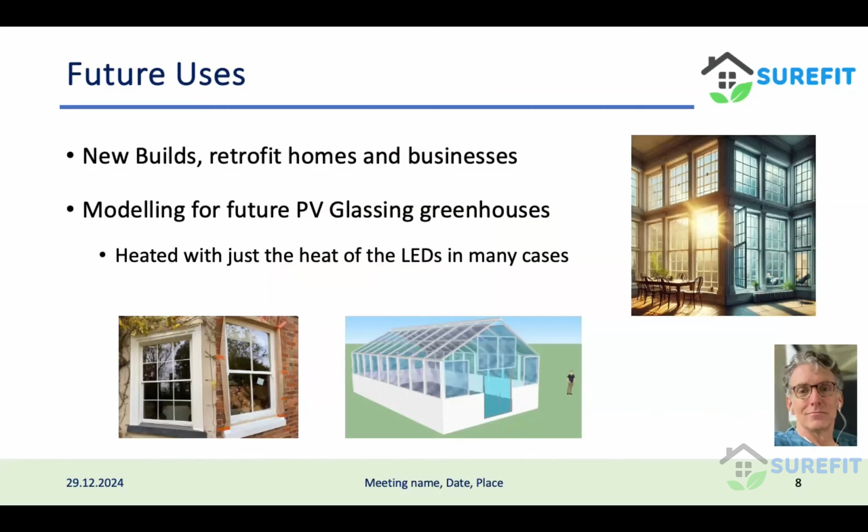And if there's any questions, please forward it through the system, and I'll get back to you.